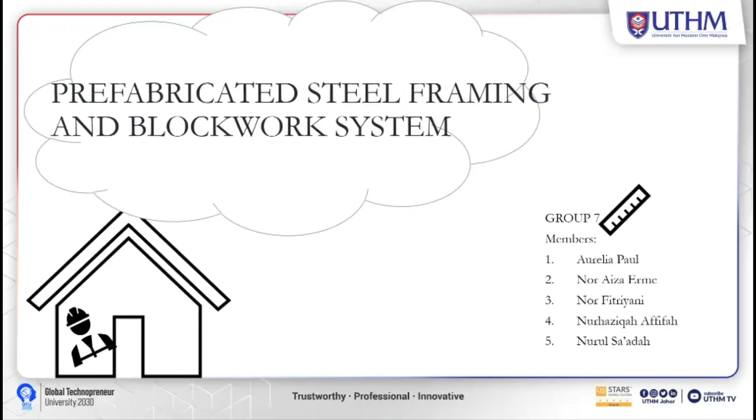So hello everyone, for the introduction from this group, the project will be conducted or is located at Taman Desa Botani, Batu Pahat, Johor. So there will be two projects that will be conducted, that is a 2 hectare land of business hub and one mini community hall for the use of the citizens who live at that area.

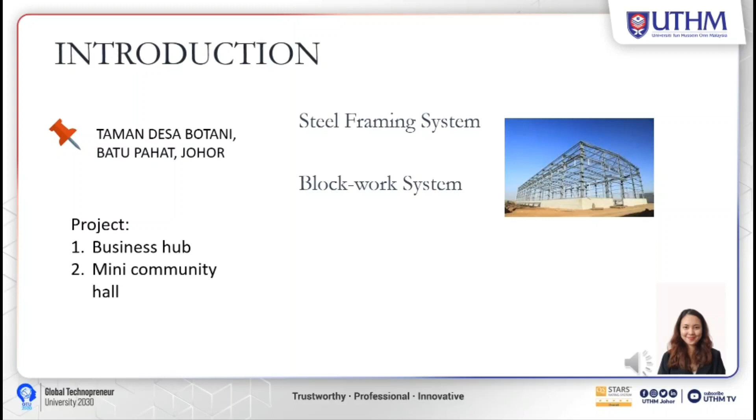So for this project, there will be two IBS systems that will be used, that is steel framing system and blockwork system. Modular coordination, or MC, is an international system of dimensional standardization in a building. So the module is a basic dimension which could, for example, form the basis of a planning grid in terms of multiples and submultiples of a standard module.

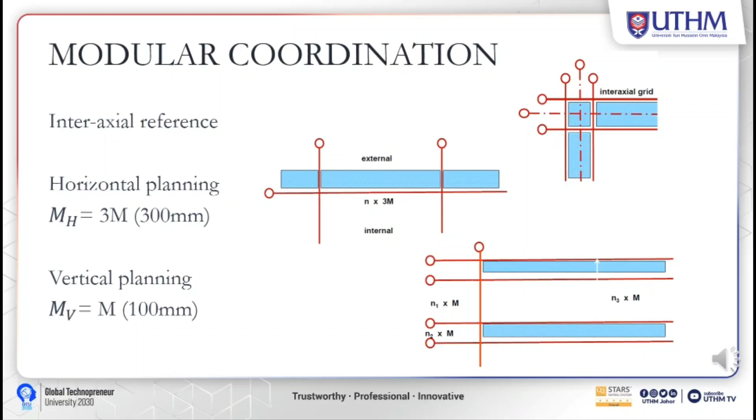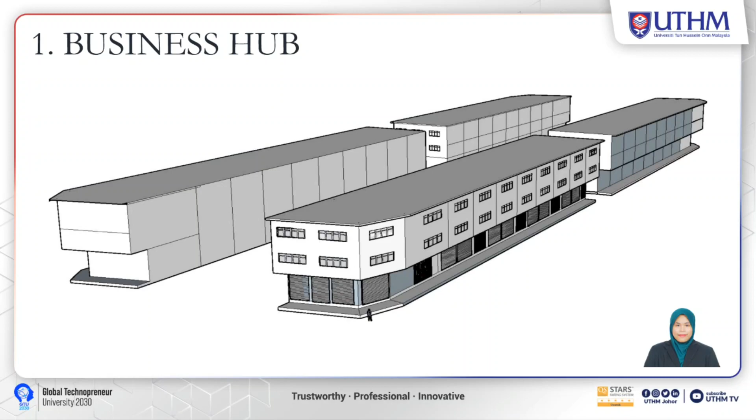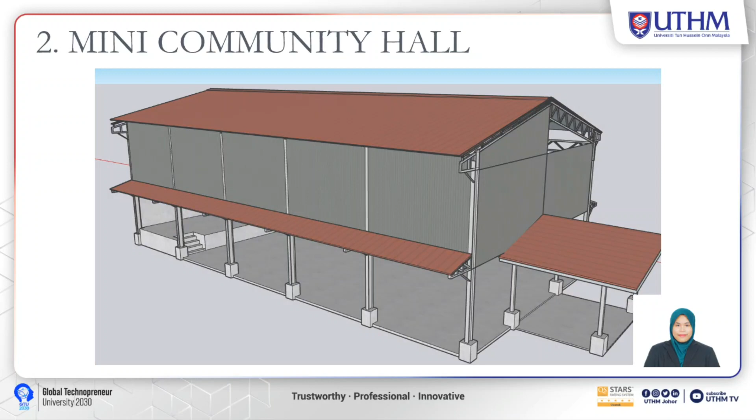This is the side view of the building. The three-dimensional drawing of the mini community hall. This hall is using a prefabricated steel framing system. The reason is the steel structure is lighter and strong, which is compatible with the community hall. These are the examples of components used, steel column and steel truss in the building.

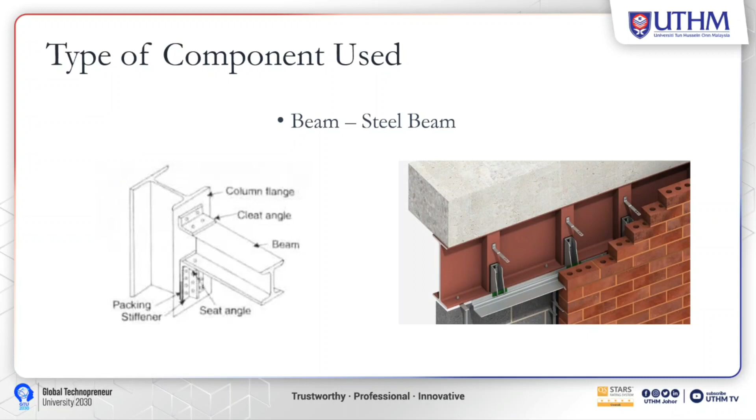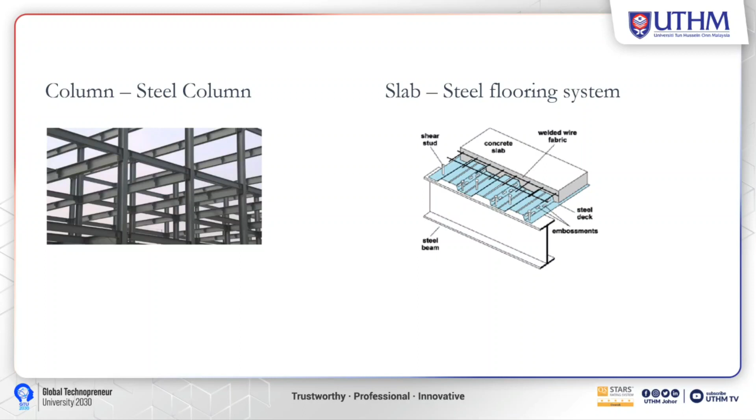So I'm going to talk about types of components used for both of our buildings, which are the mini community hall and business hub. So first things first, we are using a steel beam for the building structure. Next we have column. We are using steel column. Slab, we're using steel flooring system. Next, roof truss, we're using prefabricated metal roof truss. And for internal wall, for the business hub building, we're using lightweight blocks.

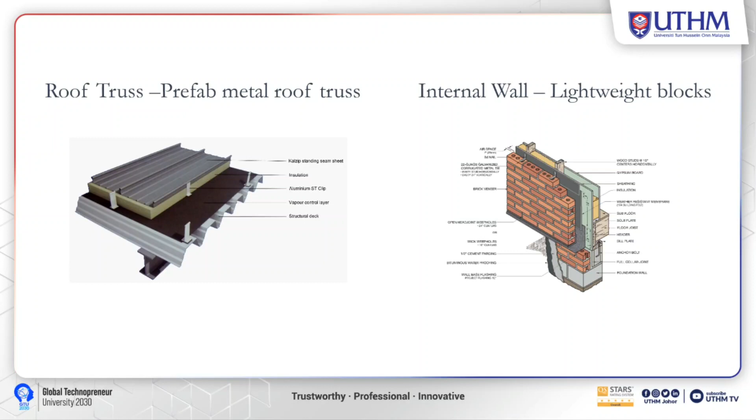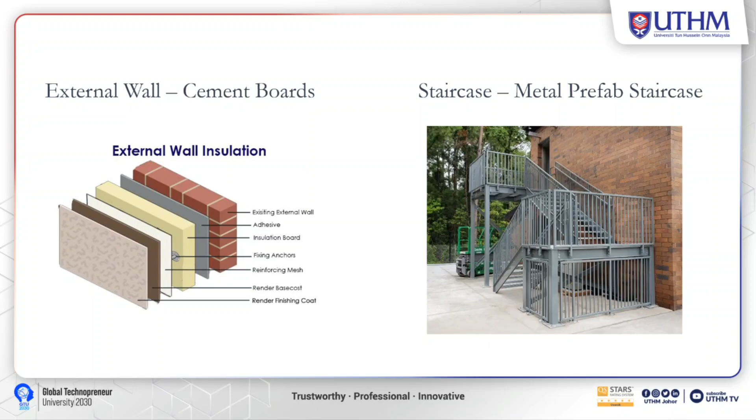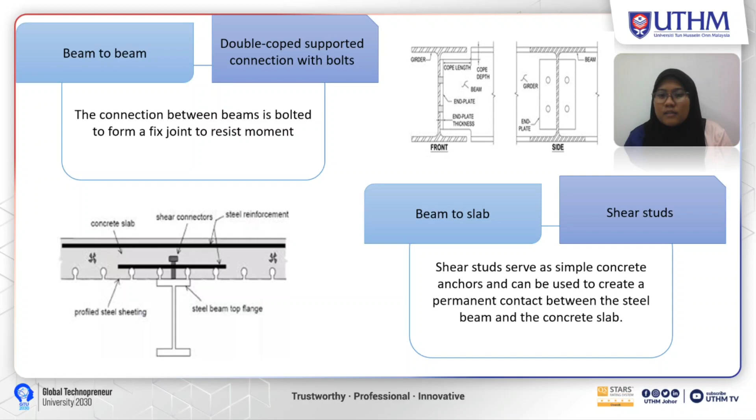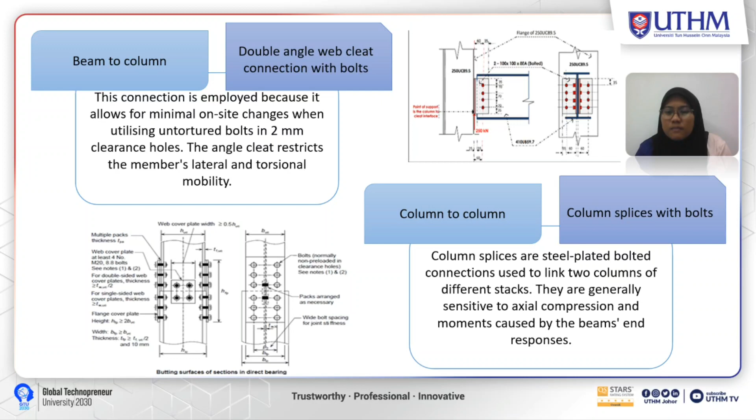Beam to column, we use double angle web cleat connection with bolts. This connection is employed because it allows for minimal on-site change when utilizing untortured bolts in 2 mm clearance holes. The angle cleat restricts the member's lateral and torsional mobility. After that, we use column to column splice with bolt. Column splices are steel plate bolt connections used to link two columns of different stacks. They are generally sensitive to axial compression and moment caused by the beam response.

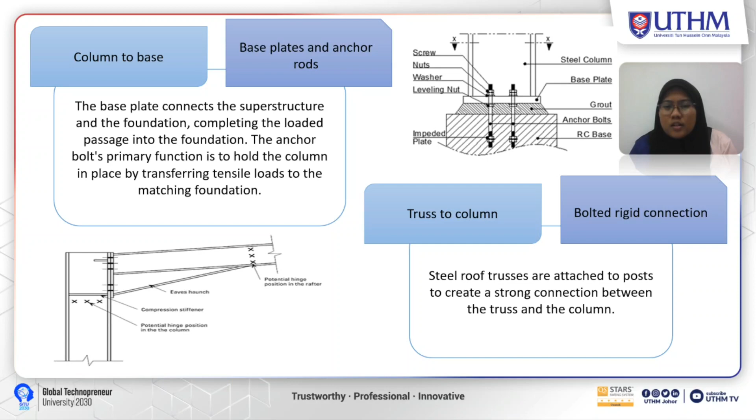After that, for column to base we use base plate and anchor rod. The base plate connects the superstructure and the foundation, completing the load passage into the foundation. The anchor bolt's primary function is to hold the column in place by transferring tensile load to the matching foundation. After that, truss to column, we use bolt rigid connection. Steel roof trusses are attached to posts to create a strong connection between the truss and the column.

And for the staircase, we use chemical anchor or mechanical fastener. The most practical and dependable method is to use chemical anchors from well-known brands such as Fischer and Hilti to link the staircase to the structure. Chemical anchors are the most powerful and dependable anchoring device.

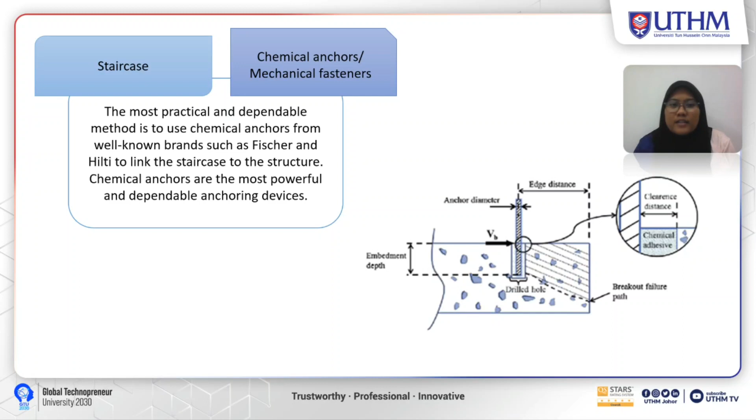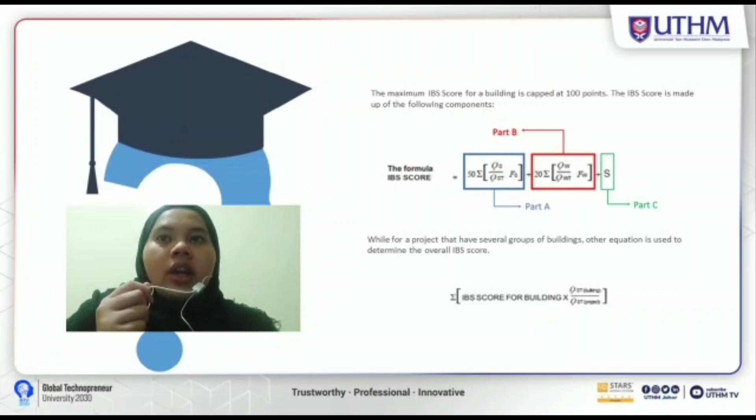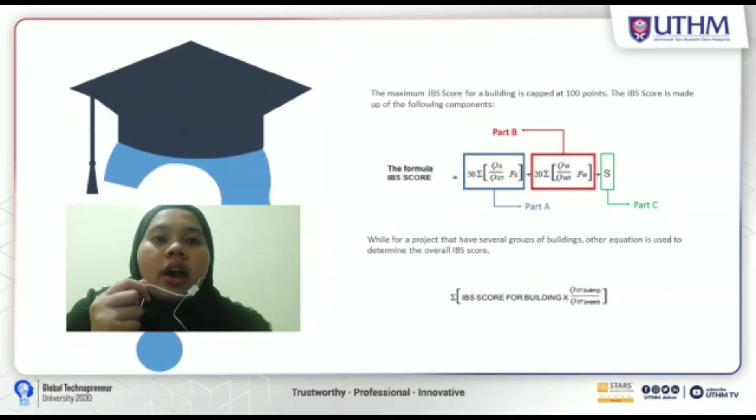So today I would like to talk about IBS score. IBS score is a systematic structure assessment system that we use to measure the usage of IBS system in a building. So the maximum IBS score will be 100 points, and the IBS score is made up of three components, which are structure system, wall system, and other simplified construction solutions. So if the project has several groups of buildings that are using an IBS system, we need to calculate an overall IBS score. All the formulas are shown on the slide.

Based on the formula that has been discussed previously, the overall IBS score is 92%. Based on the IBS score, we can determine whether paying the levy to CIDB is required or not. So since the IBS score is more than 50%, it may be exempted from paying it since it is a private project. Even so, if it's a government project, it will still be exempted since it's more than 70%.

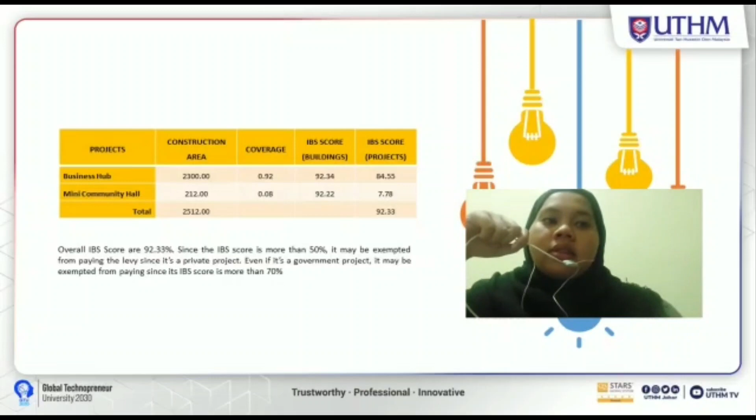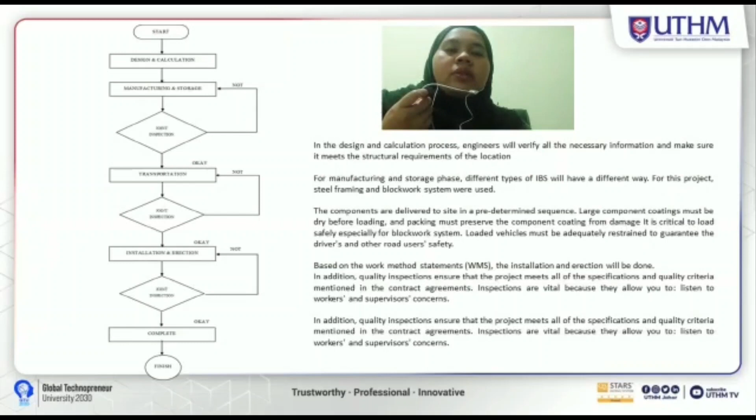The slide shows the construction sequence of this project, where there are numerous stages involved, and it starts with the design and calculation process and ends with the installation and erection. So it is important for us to follow the work schedule so that we can save time and cost. And the design and calculation process is essential because based on that process we can verify all the necessary information required for the structure requirements.

And for this project we use an IBS system, therefore all the products will be manufactured in the factories, and after that will be transported and assembled at site. So it's important for us to do a joint inspection to make sure the quality is met.